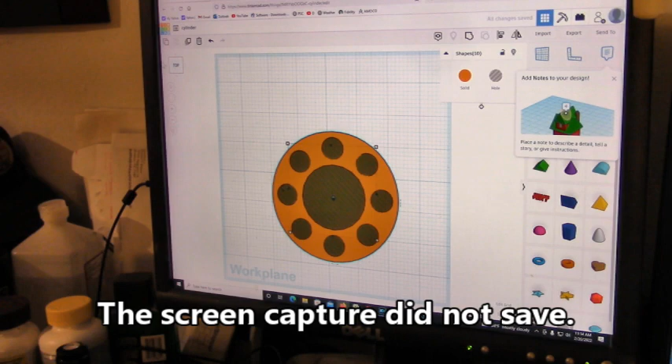Now you can see I have already made this thing one time, but we're going to come along. Actually, I've made it 3 or 4 times. Hit delete. Oh wait, I have to unlock it. There we go. Now when I hit delete, it all goes away. We're going to start over fresh.

Normally Tinkercad wants to work in millimeters, but if you come down to the bottom of the screen, right down there, edit, grid, you've got units here. You've got millimeters, inches, and bricks. Got no idea what bricks are. And you just choose which one you want. Now I've already chosen inches, which is what I like.

Now we're going to drag ourselves a cylinder over here, because that's what this is all about. It's a cylinder. We're going to come to this little icon in the corner there and roll it over to where it shows front. If you double click on whatever thing, front, top, side, it'll square it up with the screen. Alright, now we want this thing to be 3 inches tall.

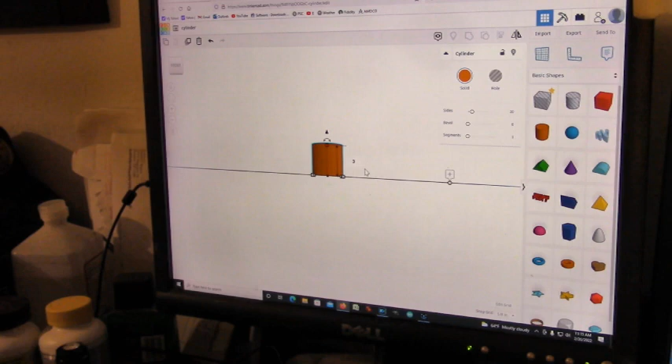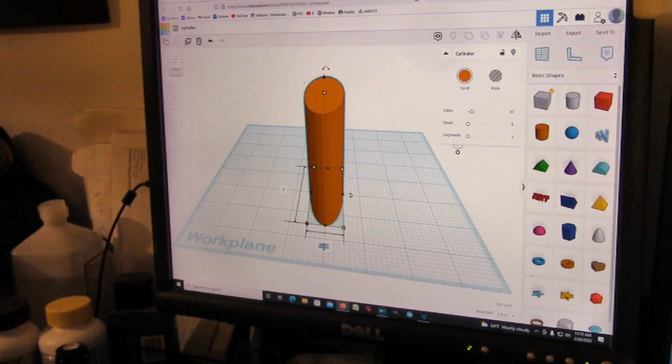So there's a 1 out there. We're going to turn that 1 to a 3. Now then we're going to pick this little guy, turn it. We want it to be 3 inches in diameter. There's a 1 there. We'll turn him to 3 inches in diameter. Well, we roll him over where I can find the one that didn't work. There we go. 3 inches in diameter. Alright, we're just using the arrow keys to move it around.

And we just have to center it up, sort of. Now you see how it's got all this jagged edge there? The way you get rid of that is to increase the number of sides. See how much smoother it is now? I run it up to like 52 sides.

Alright, so we'll drag us another thing over then, a cylinder. This is a hole. Alright, now this hole needs to be 1.5 inches by 1.5 inches.

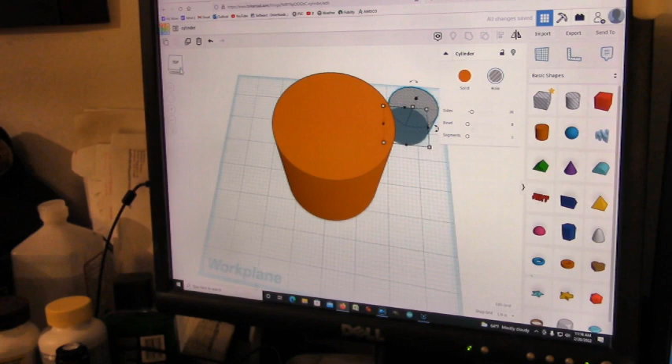Okay, and then we want it to be a particular height. We want it to be 3 inches tall. We hit that, bring it back to the top. I would like for that to go away.

Alright, there it's 3 inches tall. Now I'll use the arrow key to move it down to approximately the center. I'm going to select both, then come up to this little icon that is a line, and you get these little dots that align different things in different ways. I believe this one centers everything. Looks like it worked. Okay, just click out here somewhere, and all that command goes away.

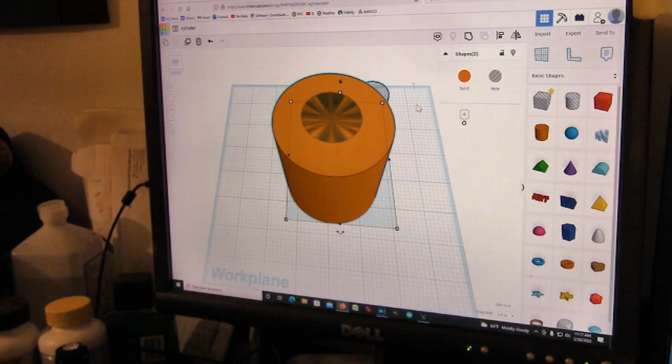Alright, now then we want to have holes around it, so we'll drag this other hole over here. We'll roll it back around. I'm going to drag this hole. Well, let me move - dang it! I want that hole moved around here to the front where I can see it, and I'm going to click on it here.

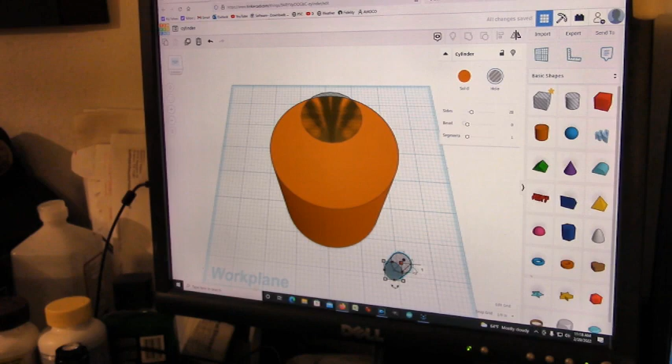It's going to be 1/2 inch, that's 0.5, and we'll click on it over here. That's 0.5, and we want it to be 3 inches tall. Click on it there, put a 3 in there. Alright, now we've got a 3-inch tall hole.

Alright, we're going to roll this thing around. I messed that other thing up, didn't I? I sure did. Alright, we're going to move this hole back up out of our way. It went perfect every other time that I did this.

Alright, we'll hit the align button. We'll hit this little dot right there - wrong one, alright. I'm going to hit the align button again. Must be this one. There, there we go, we're aligned again.

Alright, now let's select our hole, move it down here. That needs to just move. Alright, it may or may not be equally spaced there. In fact, none of it's equally spaced at this point. Let me go back through the align and make sure that I've got it right.

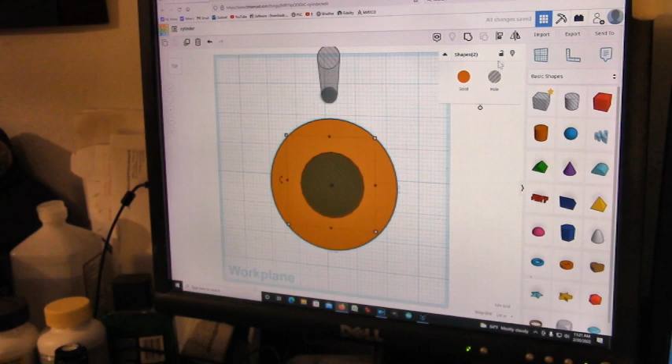Alright, I think that aligned everything just right. And we'll move our hole down here.

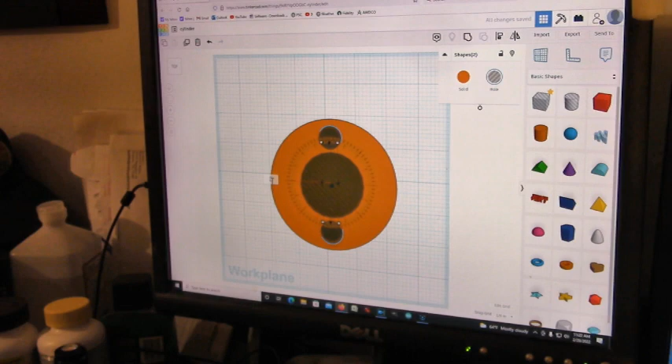We'll do a Control D on it, and that duplicates it. We'll move its duplicate down here. Alright, now then, Control D should have duplicated it right on top of the other one. There, now then, see the little arrow here curved? Come over here to the hole, 45. Let's turn him 45 degrees.

Alright, we do Shift, Select, Select, Control D, little arrow, come on, Shift, Select, another 45 degrees. Alright, Shift, left mouse, Control D, where's our little arrow? Right there, 45, and there you are.

You've got 8 holes in a circle, and it's all 3 inches tall, just like - and don't worry about the fact that the holes are sticking up. The stuff sticking up will go away. After all, it's a hole.

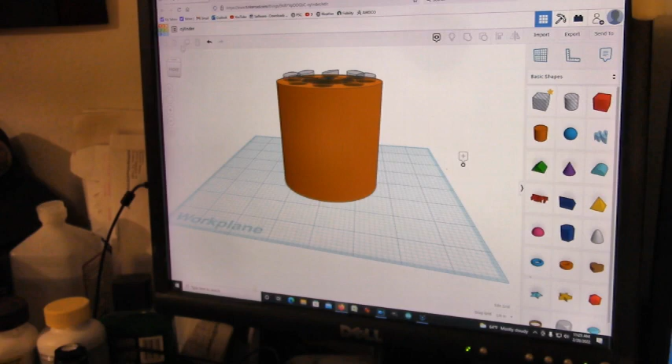Okay, you can see that the holes should be coming through the bottom. You can select them and push them down a little bit. You want to make sure that they're sticking through. Alright, now then, just roll it over and look at the bottom. The only one not sticking through is this guy right here.

Alright, now it should be just right. While we have a little bit of stuff on the side, I don't know - you saw when I started, the one I had already made was basically perfect. Why this thing decided to plague me now, I don't know. But nevertheless, this is the worst time I've had with it yet, so I don't know what to say.

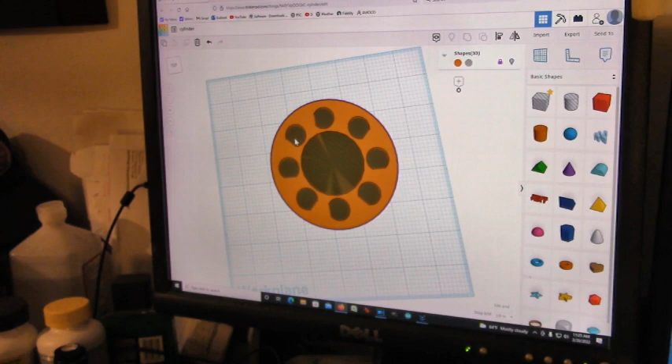Alright, so that concludes it anyway. I could export that thing. Now I can make it just a little bit taller if I want to make sure that they're sticking through right.

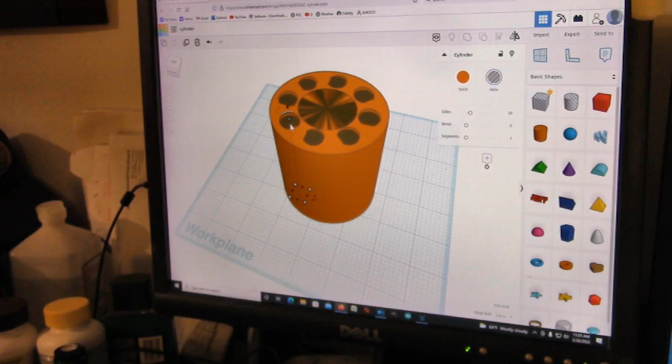I have to unlock it. And I can come over here and roll it a little bit. No. Alright, now then, make it. There.

Making sure that we get rid of all those little imperfections, because I know somebody out there is going to say, well, yeah, but look, you didn't do it right. So...

I wish the screen capture had worked before, and I wouldn't be suffering through this because everything went perfect before. Of course, it didn't save it.

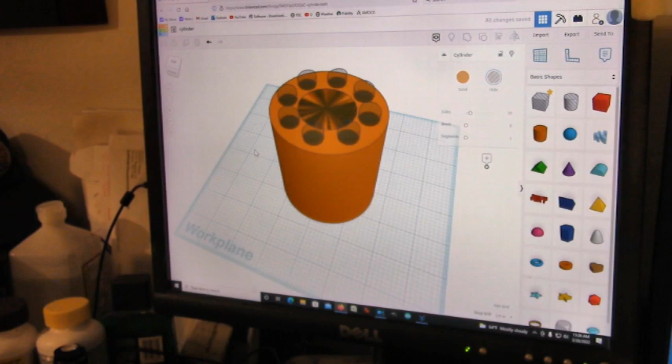Alright, now then, let's look at the bottom. They're through the bottom, they're through the top. So, lasso the whole thing and we'll lock it. Now it's one piece, one item, one drawing indivisible with liberty and justice for all. Alright, there you are.

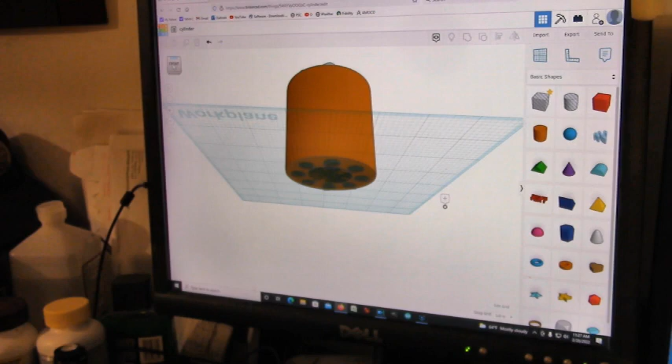Okay, the next thing we're going to do, I'm going to show you - I could export this. I could export it as an OBJ, STL, GLTF, or SVG. Myself, I use STL or SVG. SVG is for my plasma cutter, STL for the 3D printer. And there you are, I think that ought to be good enough.

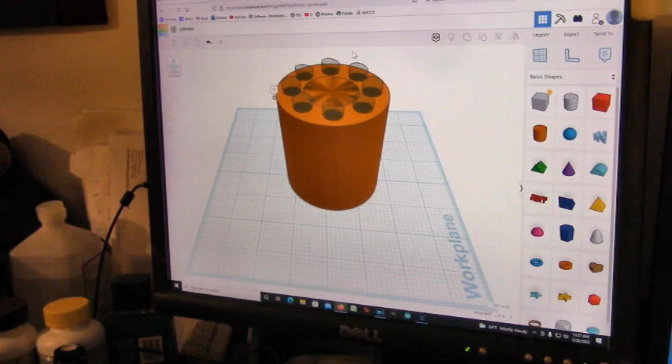We can terminate this thing right here. We will stop there, and I hope that I have captured something. I can see over here on this other screen, there's a capture there. And if it's no good, I'll load it into the editor and we'll do a voiceover. How's that? But so much for that, Tinkercad will make it go away. Alright?